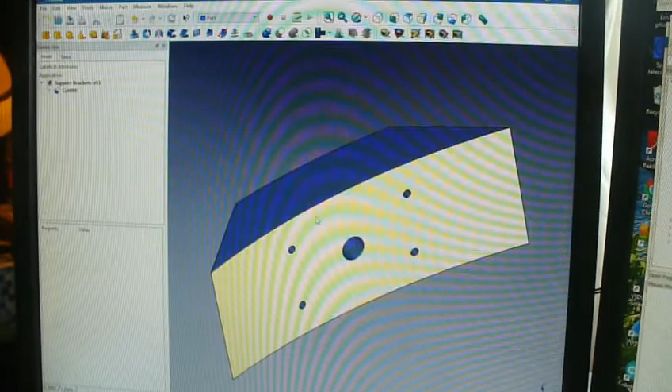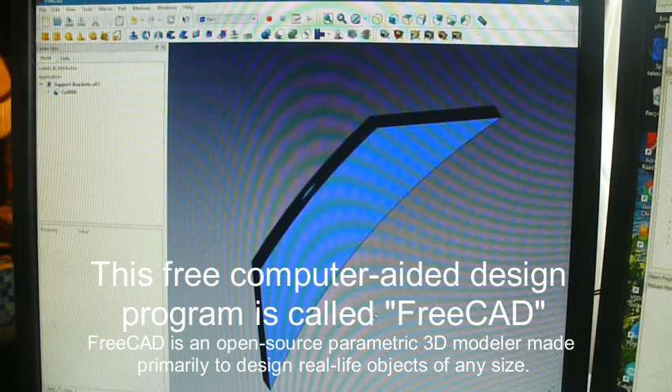Okay, so here we are working in FreeCAD. This is what I want to get to. So this is basically the support brace, and it's rounded so it can go around the edge of the telescope base. And of course it's got holes in here. The center hole is for the mount bolt or whatever that is, and these little holes up here are for mounting it to the outside piece.

Alright, so the next step is going to be to build this. Okay, I'm going to cancel this because the first thing we need to do is go to File and then load the model file. The support brackets, version 3.stl. I'm going to open that, and there is our little support bracket.

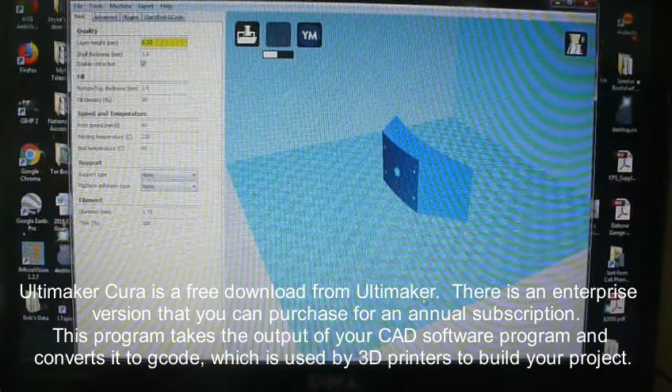And it says here it's going to take about 2 hours and 41 minutes, take 23.18 meters and 69 grams of filament. I don't know if I have that much. I have a kilogram of it, so I started out with a kilogram. But I can adjust these speeds here by adjusting these thicknesses, the print speed, the printing temperature.

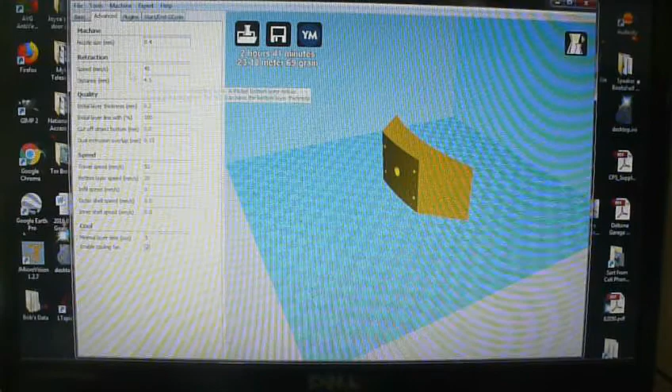So anyway, once we do this, file, and then print. What this print does now, it generates this stuff right here, this support brackets V03.gcode. Now, where does that go? I've already saved it, so I'm not going to save it again. We're just going to cancel here.

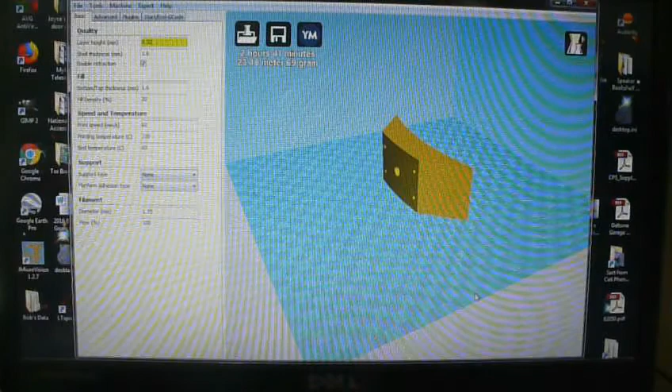The next step, of course, is after I pull that up in Cura, to basically crank this guy up. Let's see what we're going to do. First thing we're going to do is position and auto home.

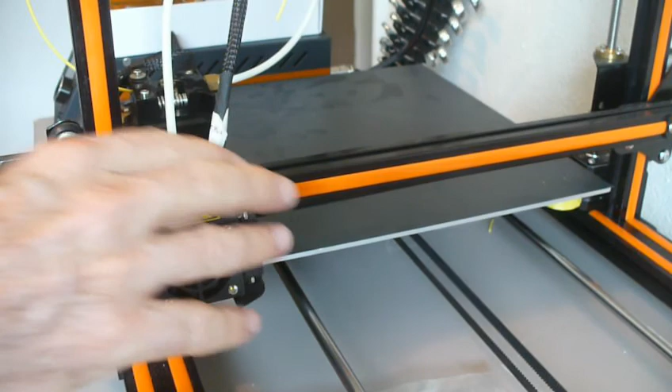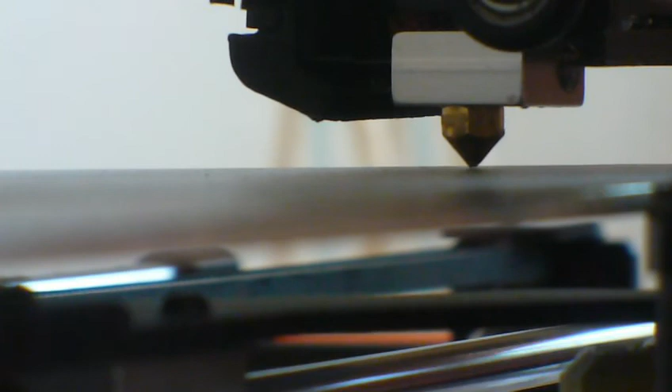Okay, so what this does is sets where it thinks zero is. And once I get that, I'm going to shut this thing off, and then I'm going to level it. I have to shut it off because I can't move this stuff around when it's on. So the leveling process is pretty much just a little piece of paper and positioning over this guy. But the hardest part about it, or the most work that I have to do, is basically leveling this bed.

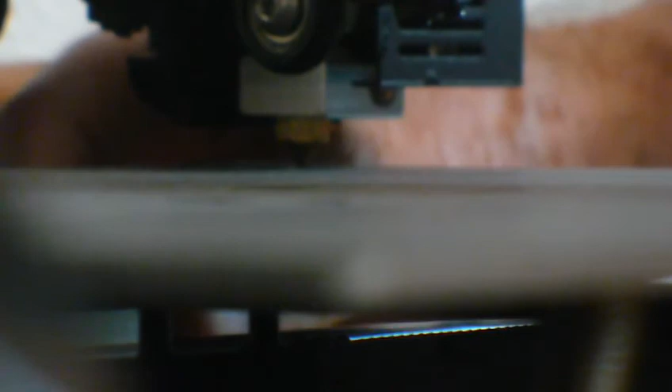And this is just a little piece of paper here. Now if it's not going in, that means it's too close. Come down just a bit. You really have to have it close to the bed. Okay, so I'm going to do the other two corners, and then we'll get ready.

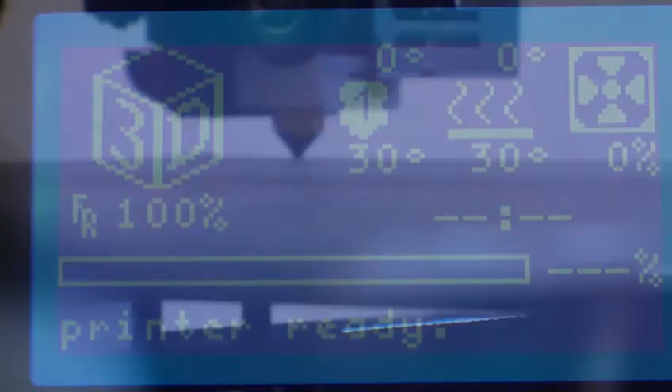Okay, so here we are at the 3D printer, and I can't even remember the name of the company I bought this from. But we're going to go into the menu, and of course what you can see here is the nozzle temperature, this is the bed temperature, and this is the fan. Right now we're not burning anything because we don't have anything running.

So now we're going to go back, and I think the first thing we're going to do is back up a little bit. I can't back up anymore. Prepare... now we should preheat. Yeah, it's PLA.

So that's going to start heating up the nozzle. And then let's also prepare, preheat. Let's see, we're going to position first and auto home. What that's going to do is push this, put everything back where it's supposed to be. Auto home.

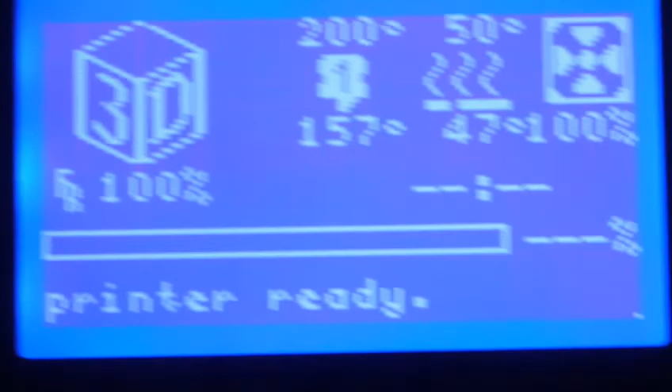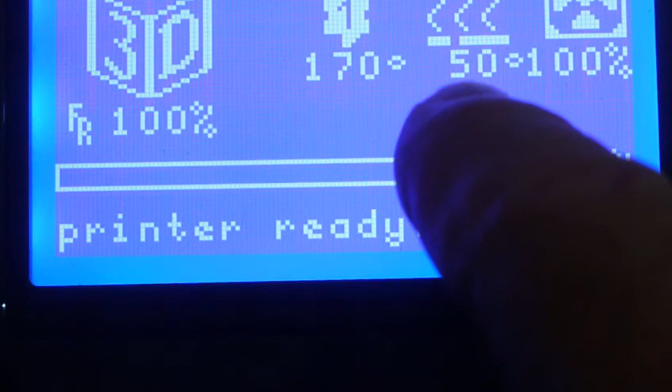Now I've leveled the bed, so it should go right back where it's supposed to be. Okay, so I've set the nozzle temperature on this to 200, and the reason for that is because if I don't set it higher, I'm just going to set this down a little bit. It tends to jam up, and the bed temperature should be at 50 degrees C, it's going to be pretty warm.

So let's go back and take a look. What we want to do is print from SD, because what we've done is loaded the file into the SD card. The card plugs into the side over here. I still got this on the Zoom. So, print from SD. I'm going to look for it... there it is, support brackets right there.

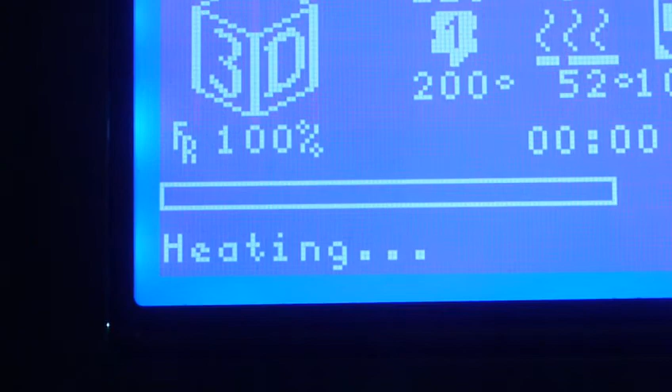Okay, so I'm going to choose that one. And as soon as it's warmed up, it's going to start printing. It needs to go to 200 here, and it needs to go 50 here. So when we get there, we'll bring you back online. And the fan is working 100%.

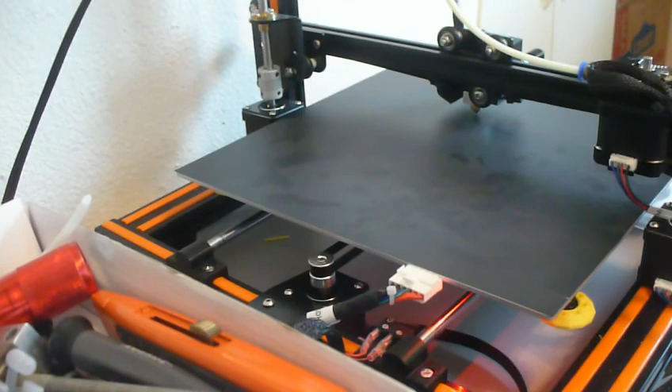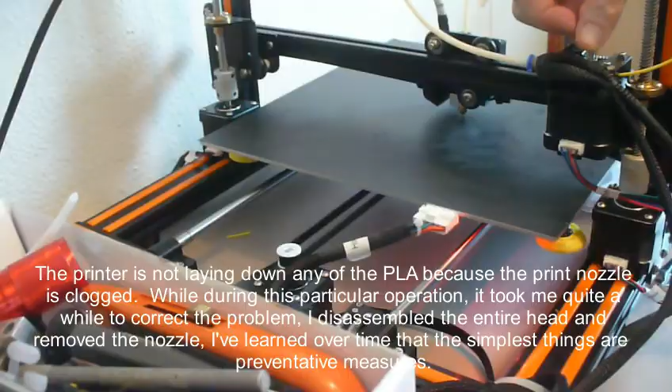Let's hope that's taking. Okay, so now she's laying down the first... not laying down anything. It's not laying down anything because the printer filament is skipping. See how it clicks? All the clicking is going on right over here because it's not feeding filament into the nozzle, and it's not feeding filament to the nozzle because the nozzle is clogged. So it's not putting anything down. Alright, so this is a battle that I'll go through all the time with this particular machine. We're going to stop this machine.

Control, reset. Alright, so I stopped it. I just put reset and it resets the printer.

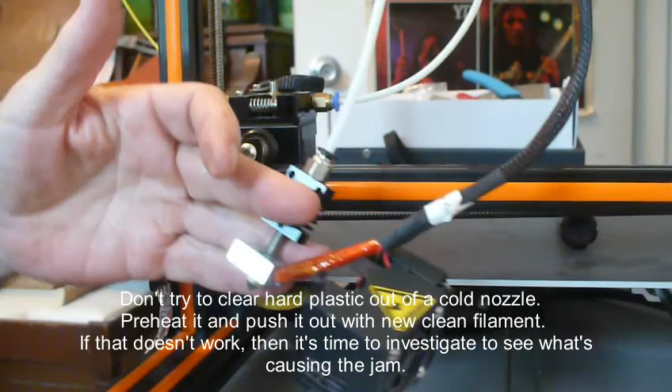Some of this stuff you almost have to be a magician to do it. I didn't think I could find a 0.4 millimeter wire to clean out the nozzle. I mean, I did everything I could to clean this thing out, but I didn't have a 0.4 millimeter wire for it. Then I thought, well, maybe there's a hardwire brush somewhere in the house that would work, and son of a gun, I stole that off my welding brush.

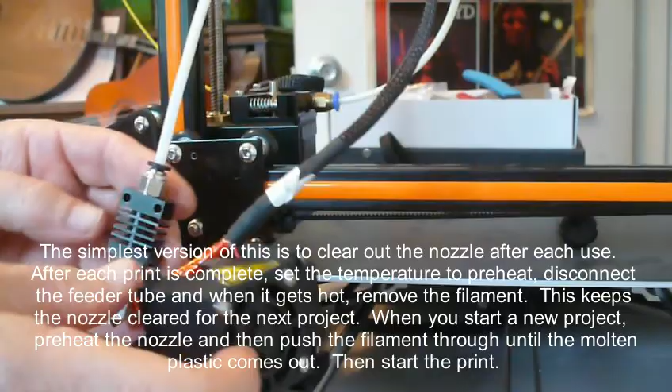So now we have to put everything back together. And this is, you gotta be able to take this entire thing apart. If you're gonna work on one of these machines, if you don't know how, you'll get stuck and you'll never use it again. If you don't know how to take stuff apart and put it back together, then you're never gonna be able to play with one of these machines.

Almost when they arrive in the mail, when you get it in the box, it didn't come this way. You have to build it. And so if you can't build one of these machines, you definitely are not going to even be able to get the first start on it.

So now I have to put all this stuff back together again and level it all over again. I had it leveled and ready to go. But it just wasn't spitting out the filament, it wasn't spitting out the plastic. So now that I've played with this, I'm going to have to do it all over again. I have to re-level it.

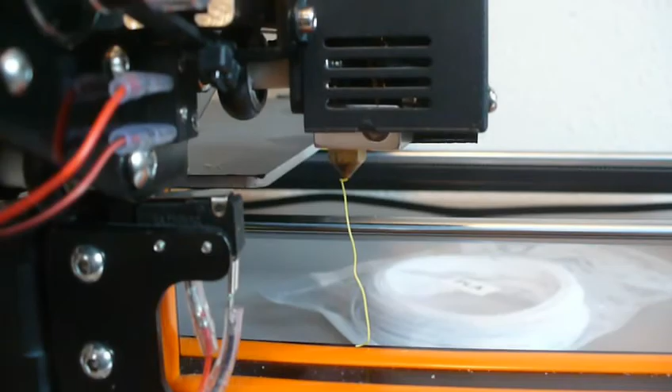I'm going to shut this off and then we're going to re-level it. Okay, so that's what's supposed to happen, and some of the PLA is supposed to drip on out of there. So let's go ahead and try this one more time. Print from SD. Support brackets.

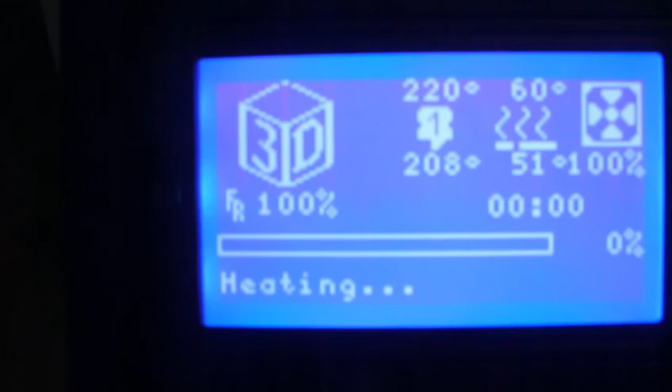I took it apart again, and I think what happened was that it's still getting up to temperature. It wants to be at 220 now. The bed has to warm up, and so does the nozzle. There we go.

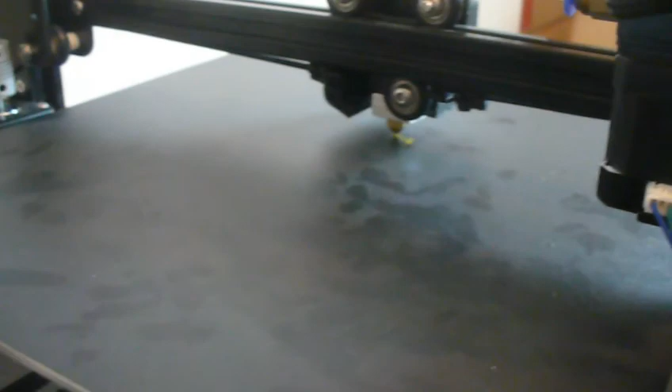Now, yes, looks like good adhesion here. Wow, okay. That's the basic form of this thing, what it's supposed to be.

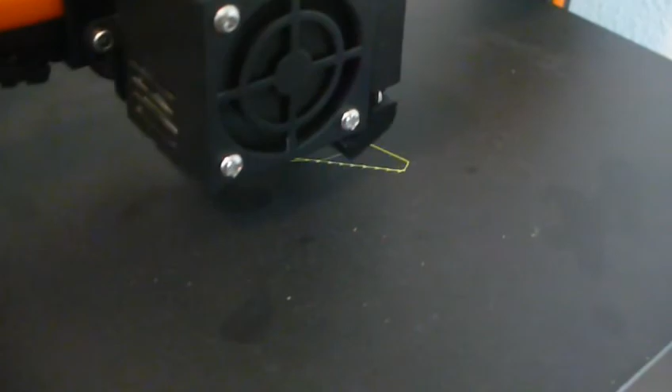So this layer here will be complete. Okay, it looks like it's laying out a skirt, which generally makes it a little bit harder to get off the plate, but it also gives it a lot more adhesion. It makes it stick to it while it's basically making it stay in place while it's forming it.

I thought I took the skirts off, but I'll look at the time now, see what time it is. See, it's definitely building the base plate in first. And this will be a solid section.

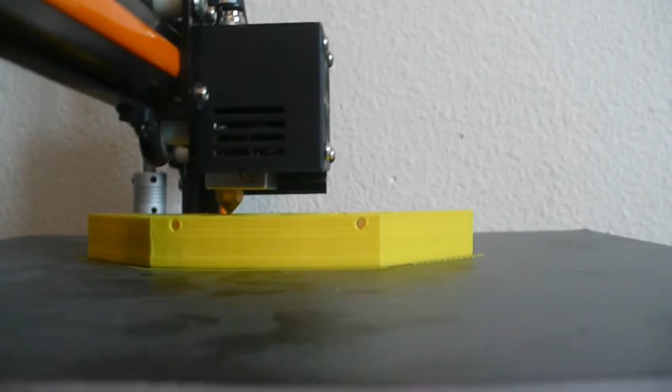Alright, so this is what it's supposed to be doing. Okay, so we're just past the first line of the 2 holes that's going there, and through there we can see daylight through the holes. I don't know if you can through here, but it's about a third of the way done here, and this is the first of 2 brackets. I like the way it did the holes, it really put a lot of solid material around the holes. It looked like, oh, this is doing the top.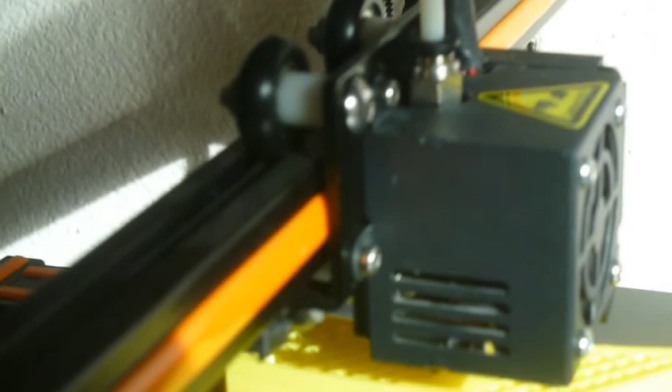That means it's almost done. So it says 95% of the way, 2 hours and 24 minutes in. It has 2 hours and 40 minutes to finish this, so it's probably got 5 or 6 more layers here. It's going to put a few layers on top of this. It should be done. And then we need 1 more because I need 1 on each side.

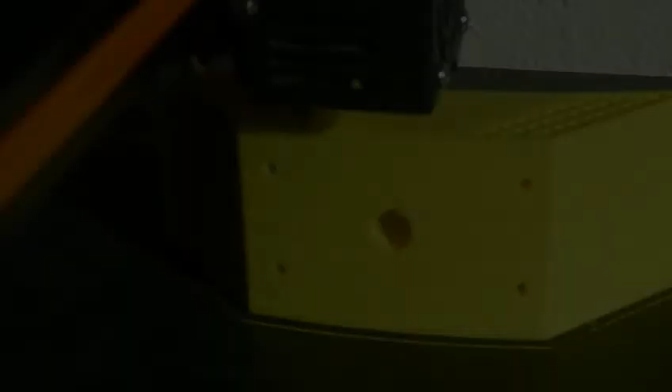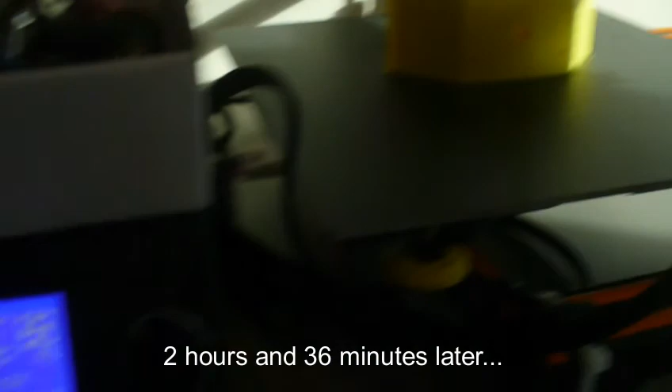Okay, done. Just now. So it did it in 2 hours and 36 minutes. Everything is cooling off right now. It's still hot.

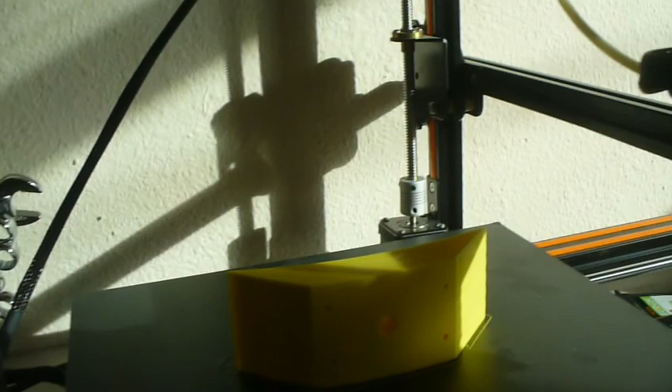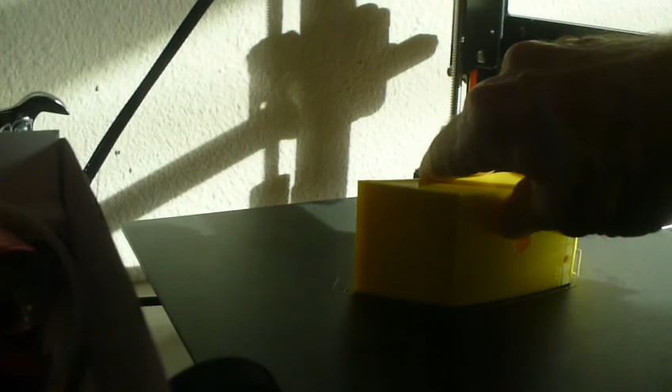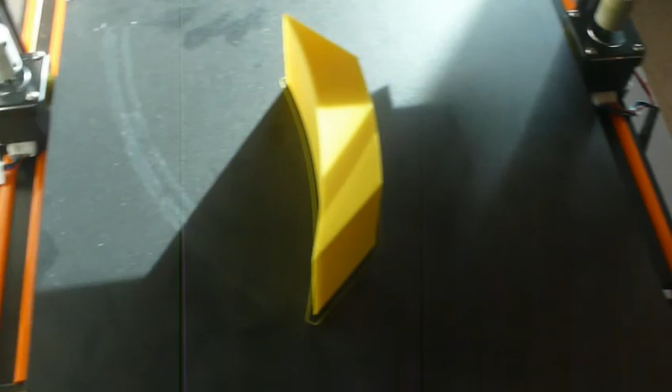So I think what I'll do is just, I don't know if I want to wait for it to cool off, because right now it should be easily breakable. Or not. Anyway, this is pretty much from vision to reality in just a couple of days. Actual time spent on it, a couple hours.

So breaking it off of this thing may not be so easy. Or maybe it will be. There it is. Alright, let's go. See if it fits. Okay, here it is. Does it fit? It's perfect.